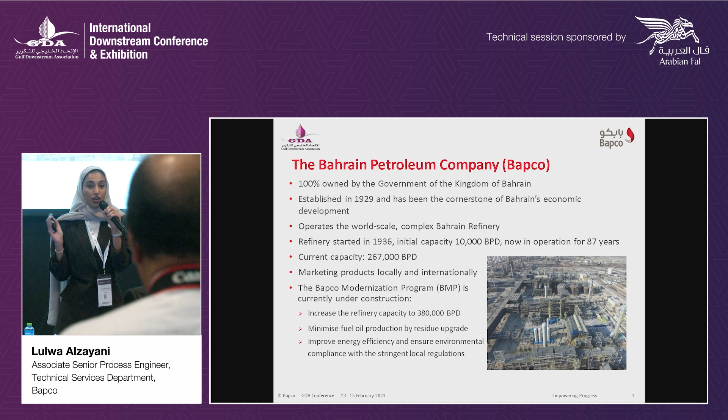And we did not stop at this capacity. Currently, we're working on the biggest project ever undertaken by BAPCO, which is called BAPCO Modernization Program, in short, BMP. This will increase our refining capacity up to 380,000 barrels per day. And also we'll be having one of the largest resid hydrocracker units, which will reduce our fuel oil yield further. And also many old units will be decommissioned after this project. So this will help us to improve our energy efficiency and our compliance to the environmental regulations also.

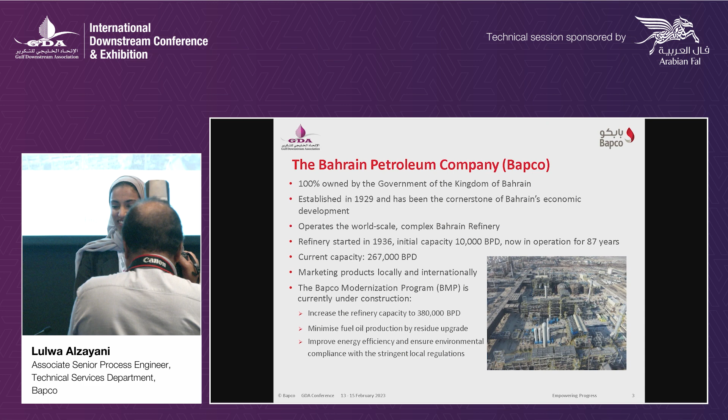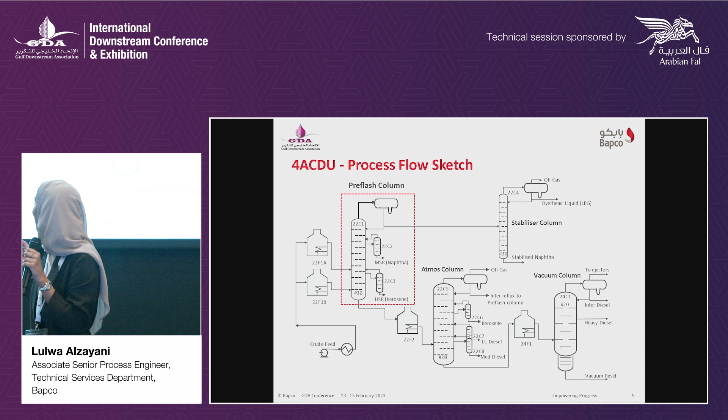Sorry. Okay, so, sorry, just. Okay, sorry, just.

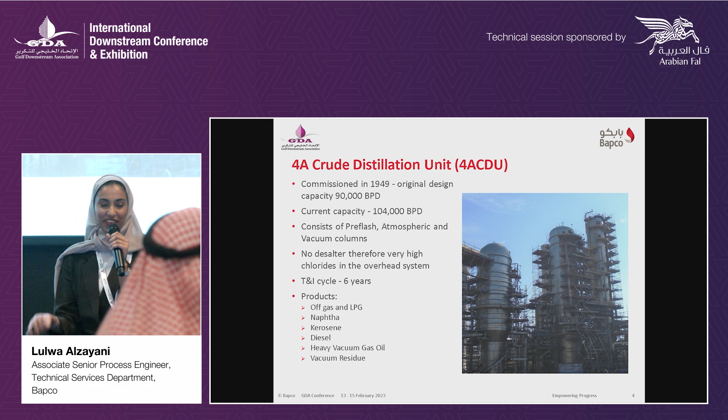Okay, so 4ACDU will be retained post-BMP, and it was commissioned in 1949 with a design capacity of only 90,000 barrels per day. And after revamps and modification, the refining capacity increased to 104,000 barrels per day. And it's currently the biggest crude unit we have in our current configuration.

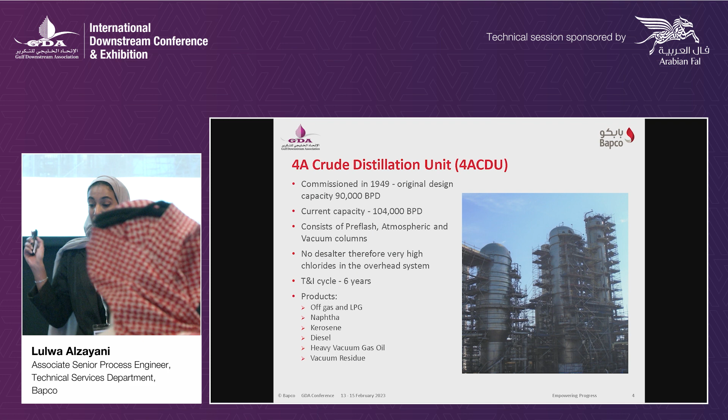So the 4ACDU is an integrated unit, as it has three main columns, which are pre-flash, atmospheric, and vacuum column, as we can see in the picture here. So this is a very recent picture of the refinery. As we can see, the columns are surrounded by scaffolding, and this is because we are currently in the middle of T&I, which happens every 6 years.

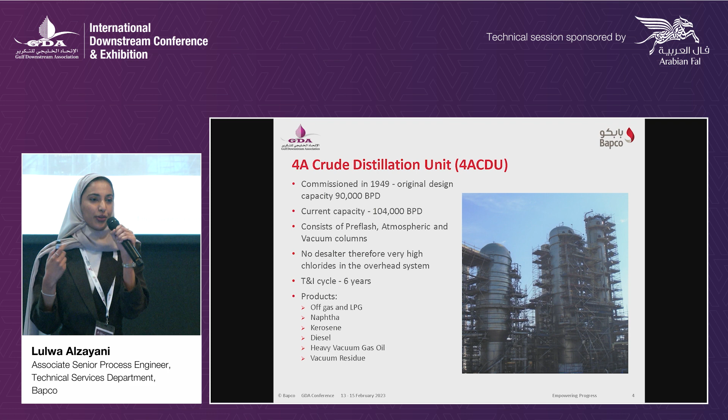Also, one more fact about the unit that is worth mentioning is that the unit does not have a desalter. And yes, we do have a very high chloride content in the overhead system, but it's all under our control. 4ACDU produces a very wide range of products, which we will look into in the next slide.

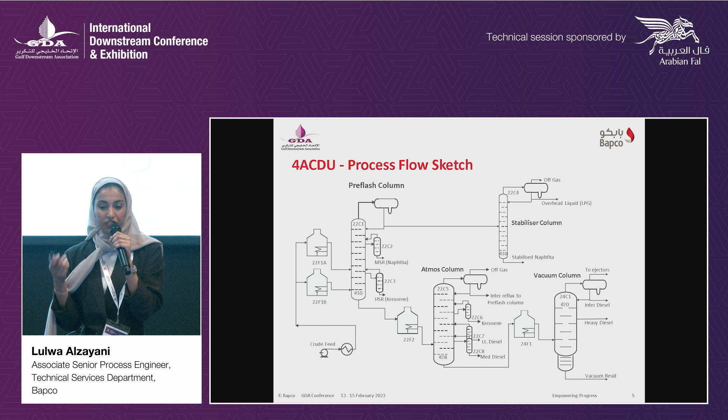So this is a simplified flow diagram of 4ACDU. So first, the crude enters the pre-flash column, which is separating the lighter cut out of the crude. We've got stabilized naphtha coming from this stabilizer, and also we've got MSR coming from the pre-flash column. From the pre-flash column, we're also producing the HSR, which is routed to the kerosene pool along with the kerosene coming from the atmospheric column.

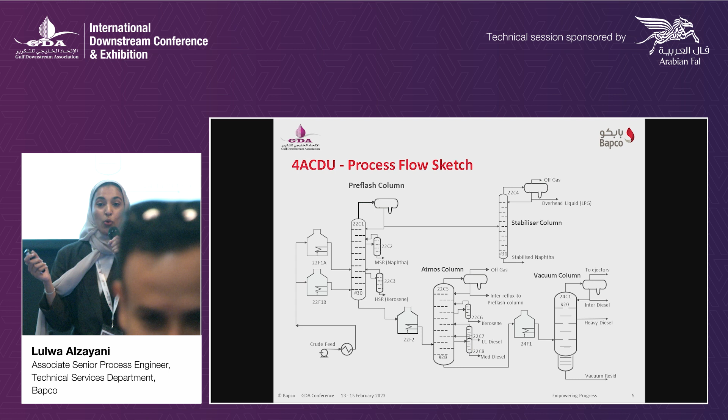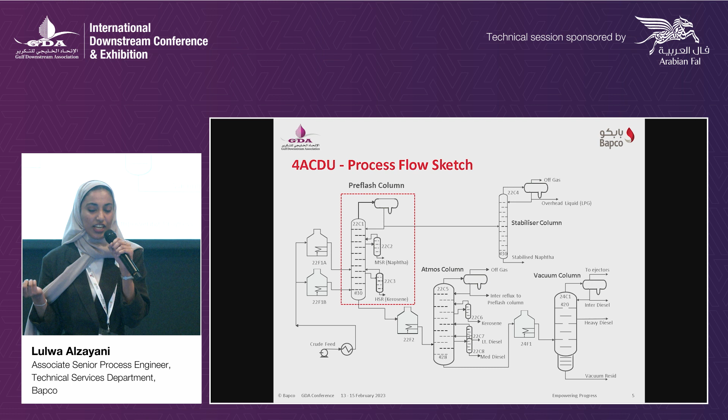We have three different cuts of diesel, which are light and medium diesel coming from the atmospheric column, and also we've got intermediate diesel coming from the vacuum column. From the vacuum column, we also have the heavy vacuum gas oil and the vacuum residue. So the scope of the presentation will be on the chemical cleaning that we used on the top section of the pre-flash column over there.

So the purpose of the pre-flash column is to separate the lighter cuts and the naphtha components out of the crude before routing it to the crude column. And this is achieved through these 30 trays. The chloride content in the overhead sour water is typically high, which ranges between 800 to 1,000 weight ppm. And this is, as I mentioned, because we don't have any desalter.

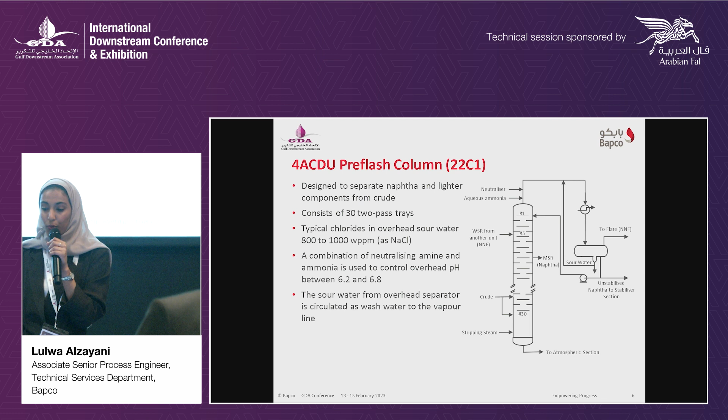So both neutralizing amine and ammonia were injected in the overhead line to maintain the pH between 6.2 to 6.8. And also we have the sour water circulated back to the vapor line as wash water, and this is helping us to reduce the potential of under-deposit corrosion in that line and overhead condenser.

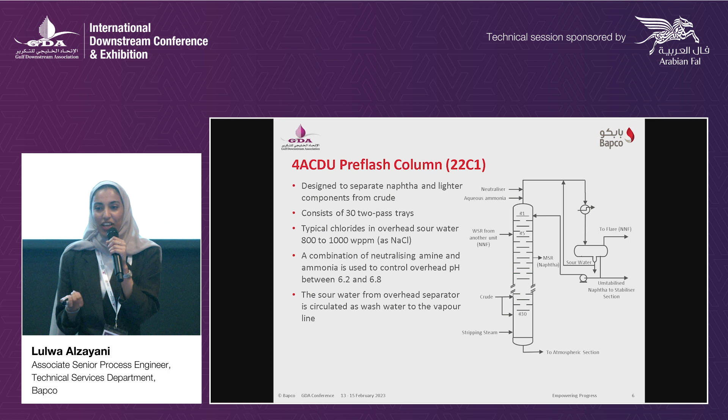So that was a summary about the unit configuration, condition, and arrangement. And now I'll hand over to my colleague Rakesh, who will speak more about the problem we had and the temporary action we took.

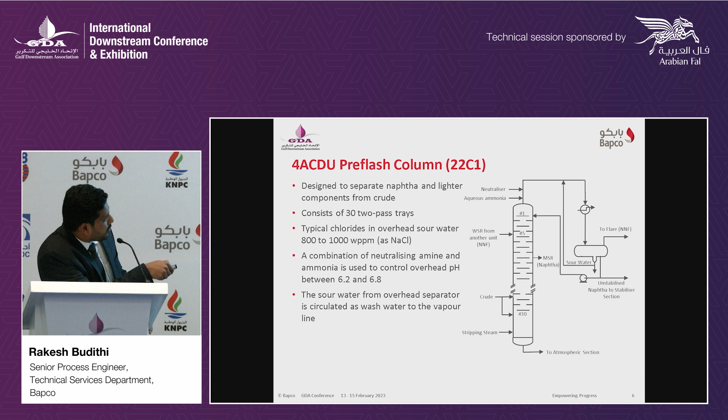Now let's move on to the main topic of our presentation. Well, on the day of the incident in June 2020, our pre-flash column had suddenly experienced a high sectional pressure drop in the top of the column, and flooding phenomena was very much evident in the top section trays, that is from tray 1 to tray 8. Let me take help from the previous slide. So this was the section, from tray 1 to 8, where we had this high pressure drop issue.

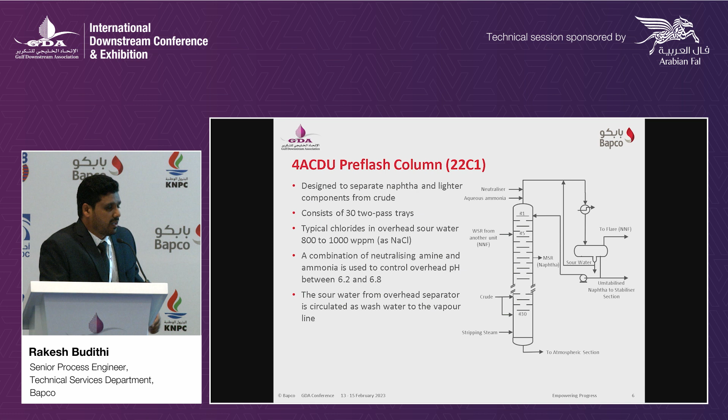And the top section pressure drop eventually went up by more than 3 folds from our normal sectional pressure drop of 1 psi, and the top vapor line went up to 290, and our top reflux flow jumped up to 1400 barrels per hour, which was our alarm limit value.

Furthermore, there was some disturbance seen in the overhead section, in our overhead accumulator, and that continued up to the downstream stabilizer section due to the overwhelmed naphtha production which was feeding our stabilizer column.

As an immediate recovery measure, our technical team and operations team together thought of reducing the feed rate to sustain the unit operation, and that helped to minimize the flooding, and basically reduced the load in the top section.

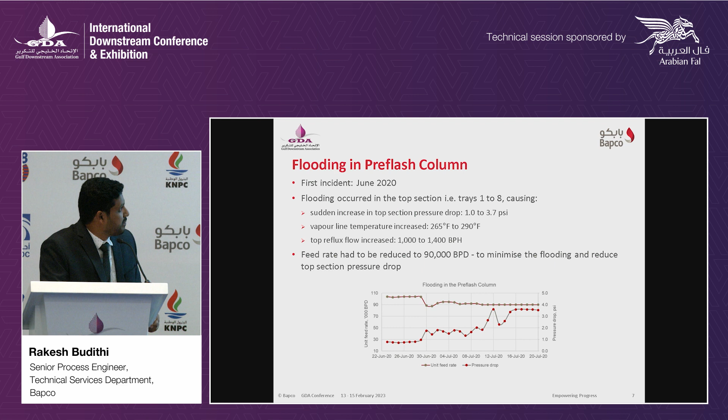As we are all aware, those were the days when the whole world was hit by COVID, and especially the oil industry saw that hardship. Crude and product prices were so volatile, and the market was so dynamic, and BAPCO was no exception. So therefore, there was a need to keep our assets reliable and ready to face any kind of demand which comes from the market.

So, having said that, shutting down the unit was not economical to troubleshoot or to do any kind of maintenance activities.

Therefore, our process team had devised a scheme to route part of our total reflux demand from the top of the column to tray 5. So we have provisioned a jump over line all the way from the top reflux line to tray 5 on the run using the hot tap method.

There is a little background for why we had chosen tray 5: we have done process simulation, and also using our general experience, usually crude columns are much more prone to fouling in the top section of the trays, usually from the top tray to tray 3-4.

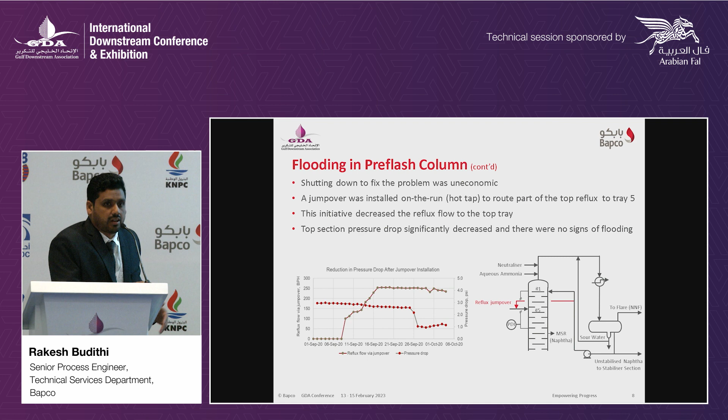This fouling in the downcomer had reduced the clearance between the downcomer and the tray below, and led to liquid backup over the tray and resulted in the high sectional pressure drop. The fouling deposits were analyzed and proved to be ammonium chloride salts.

During the shutdown, the column was cleaned up and we ensured no fouling was left over. Soon after startup, we observed that the pressure drop had become normal, like our startup run, and it was healthy. So this was the first part of our success story: we were able to sustain our unit run up to our planned shutdown of October 2020, without an unplanned shutdown for 3 months, from June to October.

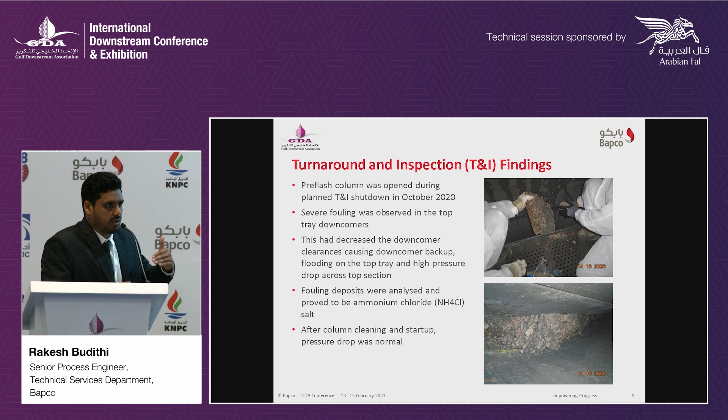Just after a few months of steady operation, the flooding issue reoccurred in July 2021 without any prior indication, and this time our pressure drop increased up to 2.5 psi. As a customary measure, we immediately reduced our feed rate and re-established the reflux jump over. That helped to increase our feed rate to some extent. However, we could not maximize the feed rate.

You may be wondering why our reflux jump over did not work in this case, unlike previously. There is a reason for that. The first incident happened in June, and this happened in July. In this region we have peak high temperatures in July, which forced our top reflux temperature higher compared to the previous time. So we were not able to alleviate the flooding issue completely.

Various ways were explored by our process team to maximize the feed rate. One such measure was to reduce the coil outlet temperature of the heater, but that led to decreased MSR and LSR yields. Hence, it was not an optimum operation, because we had to fire hard in the downstream sections to recover the lost yields from the pre-flash column.

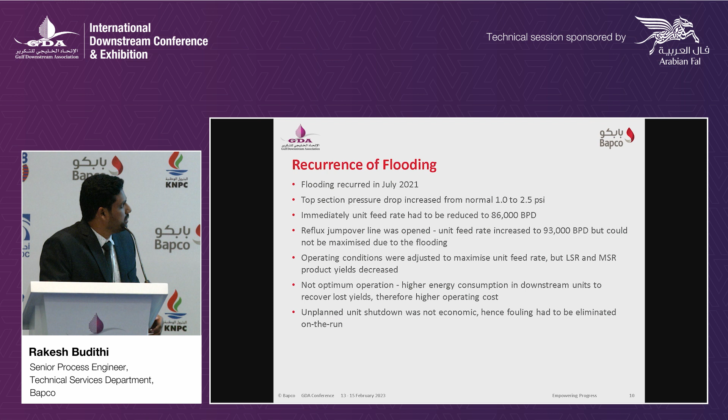This time our process team looked at various options and checked with all our networks within the region. Since the fouling was due to ammonium chloride, as was evident from our last outage, we checked with different suppliers and were able to successfully find a potentially suitable chemical to remove the salts online.

The BAPCO team has worked to make provisions on a war footing basis. Just within 1 month, we made all the setup, and we made a provision into the top reflux line to inject the chemical. As soon as we started the chemical injection, within a few hours, we started seeing the benefits as the sectional pressure drop started reducing.

And to second that, the neutralizing ammonia we are dosing, the demand of the ammonia started coming down. This is because, as part of the chemical reaction, the ammonia will be liberated from the salts, and that will be taking the load of the fresh chlorides coming from the crude. So therefore, we were able to close the ammonia dosing completely towards the end of the trial.

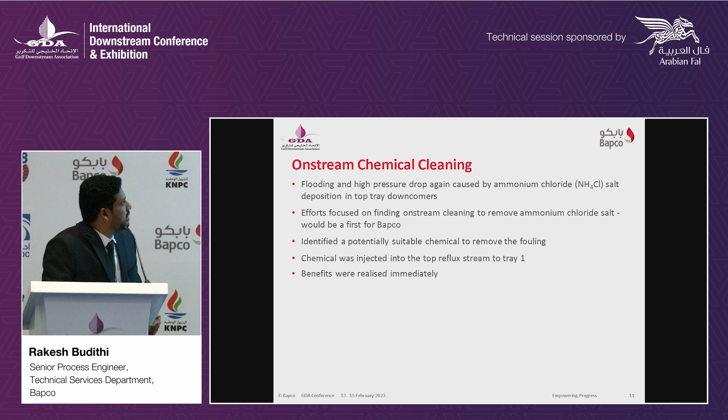Well, to summarize the results, our operating conditions, as I said before, have returned to normal. We have normalized our coil outlet temperature, and therefore LSR, MSR yields were normalized. As a result of the successful online chemical treatment, we were able to close the jump overflow completely, and our top reflux flow has normalized

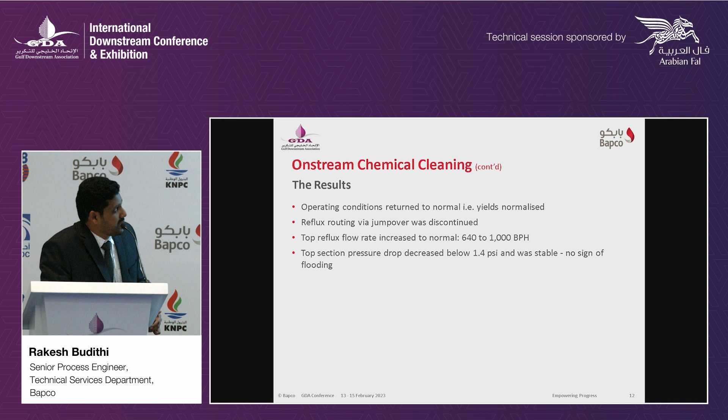to 1,000 from 640 barrels per hour. And the best part is the top section pressure drop decreased to 1.4 psi and was stable, and there was no sign of any further flooding.

This slide outlines our conclusion on this trial: on-stream chemical cleaning was a great success, as the ammonium chloride salt deposits were removed from the tray downcomers successfully. And this was the first time in BAPCO's history to deploy a chemical to remove the overhead salts. And this has definitely avoided a costly unplanned shutdown. Indeed, not once but 2 times we have avoided it.

This is regarded to be an innovative approach to troubleshoot the overhead fouling issues in the crude pre-flash section. And lastly, post-cleaning, the unit has been running well since, there was no sign of flooding, and there was no indication of high pressure in the top section.

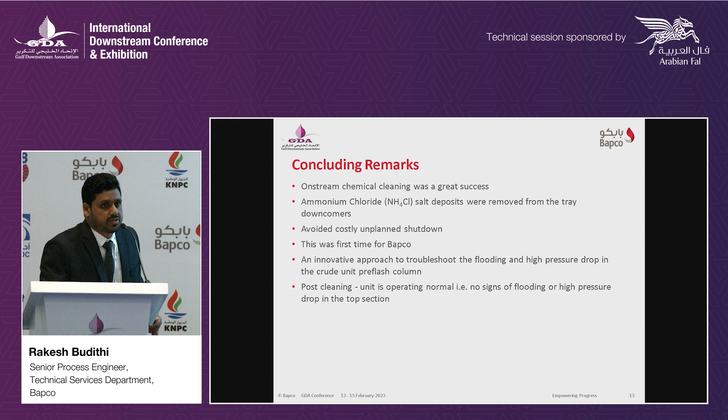And this slide outlines the key factors that helped achieve this success. At BAPCO, we all strive for operational excellence, right? BAPCO follows and delivers operational excellence and business resilience by a systematic approach towards personal safety, process safety, reliability, efficiency, and environmental performance. To achieve such performance improvement, it is necessary to possess a technically strong in-house team to always look for opportunities and to improve the reliability of the system.

It is also important to pay attention to detail, as significant gains can be achieved from recognising opportunities. It is also important to have strong networking within the industry, and knowing new advancements within the business that will help us improve our systems. And of course, a close collaboration between the multidisciplinary teams is very important, and with the chemical supplier as well. As I said before, the whole team worked shoulder to shoulder relentlessly towards one goal, to improve the reliability of our unit.

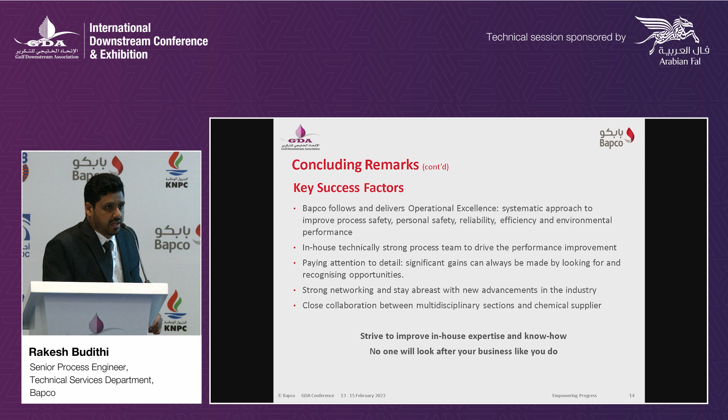So lastly, always strive to develop and improve in-house expertise and know-how, as no one will look after your business better than you do.

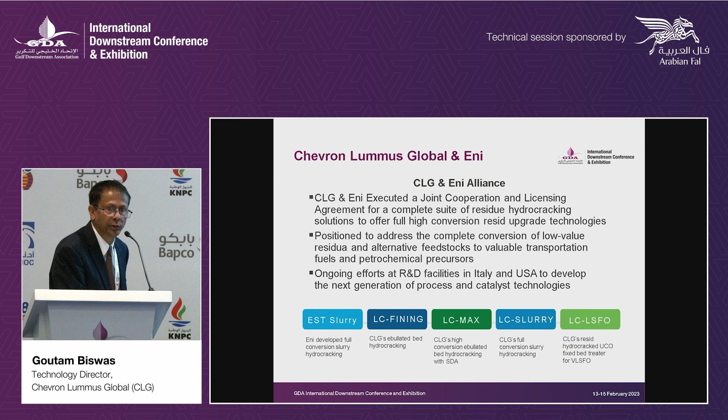Similarly, on the ENI side, they have been very successful in commercializing the slurry technology. In fact, currently 3 of the units are running, and Raffaele will share more details about that. This alliance was made to make sure we are able to offer the whole suite of resid technologies to our potential clients. And we are investing a significant amount of money and resources in R&D to improve the slurry process, as well as come up with a catalyst that's going to reduce the cost of operation for our licensees.

Next, I wanted to talk a little bit more about the product and petrochemicals outlook, and also decarbonization, and how that's going to impact future investments. Over the last couple of days we heard, particularly from S&P Global, that there is going to be demand destruction, particularly in transportation fuels like gasoline and diesel. So refineries have to adapt to a future where there is going to be sufficient demand in other products, like jet. You heard about biofuels, that's one area, and we'll talk about it here too. But there is also going to be demand in naphtha, and the main reason is there is significant demand for plastics or chemicals that's almost going to double in the next 2 decades or so.

In fact, about 10 million barrels per day of additional hydrocarbon liquid will be needed to supply the petrochemical sector. While refineries will adjust operation to produce naphtha or maybe hydrotreated gas oil to feed petrochemicals, there is still going to be about 4 million barrels per day of shortage. Those 4 million barrels per day of additional feedstock will mostly come from crude, some of it directly crude to chemicals, but that will have a resid processing unit. Others will come from traditional refining processes, through more traditional hydrocracking, where you might have a diesel hydrocracker or VGO hydrocracker, but there also you will have a resid hydrocracker.

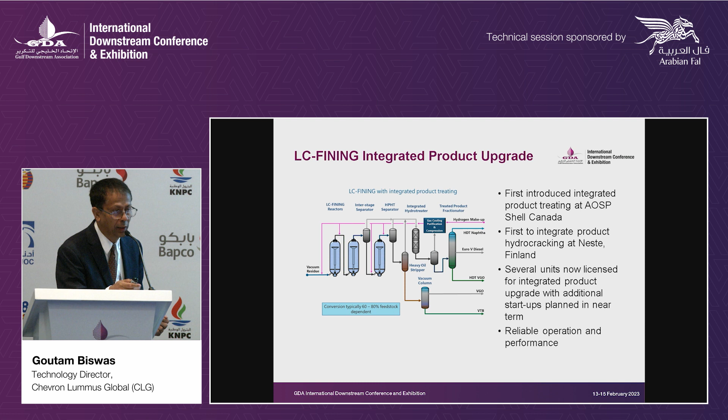This was first done for our Shell Canada unit in Edmonton. Since then, we also had a 2-stage hydrocracker built at Neste. So this is well proven, and all those units are running. The same thing we are going to incorporate in the EST unit, taking the experience from LC-FINING integrated hydroprocessing for product upgrade, where we'll put a fixed bed reactor in the same high pressure loop to upgrade the product. In that process, not only are you reducing the capex, you are also reducing the energy input, so that will create less emissions.

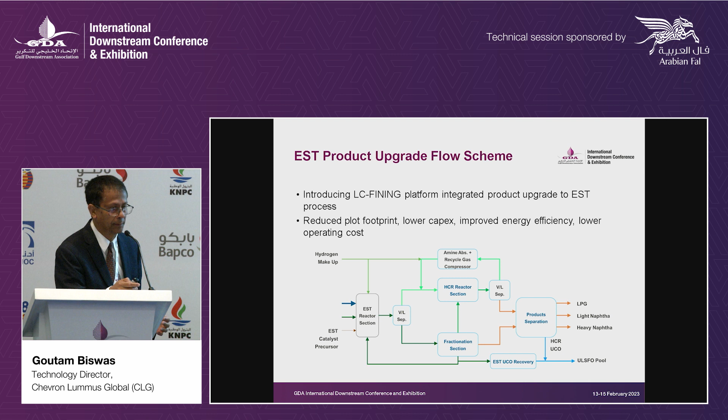The other thing is, every investment happening today, one question is being asked: is that going to be used for the future? Even in Gulf countries, looking at processing biofuels or waste from municipalities, can you utilize existing assets or assets you're going to build to process this type of product? Our technologies like EST and LC-FINING can take feedstock from circular or bio feedstock and process that.

In case of circular feedstock, you can take pyrolysis oil from plastics, or if you have the right type of plastic material, make that into fine solids, and co-feed with other feedstock like VR in our resid hydrocracker unit. You can upgrade to products, either feed it to the petrochemical unit after hydrotreating, or make transportation fuel.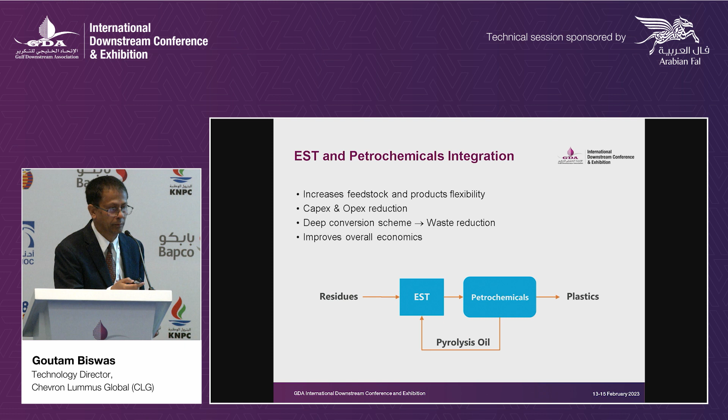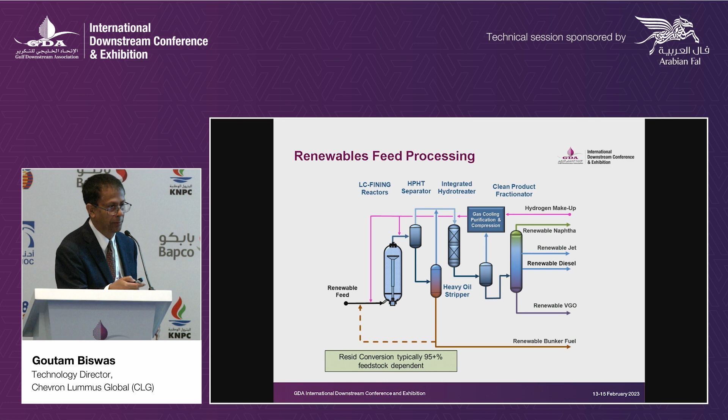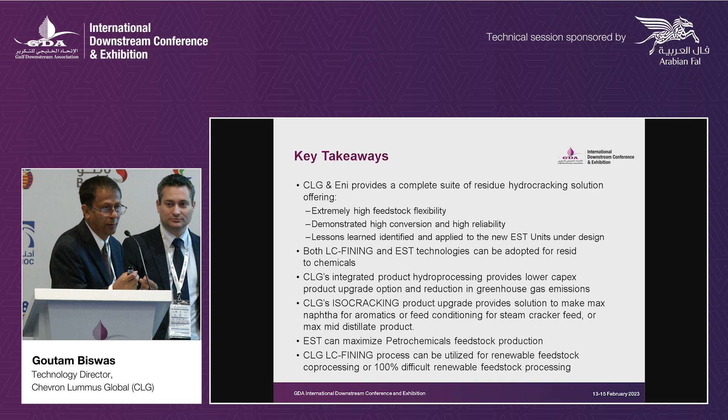I'll add one more thing, there's been tremendous success in our EST licensing. There are 3 units operating. After we formed the alliance, our first license was signed last year, and I think one of the owners, ZPC, is signing a third unit. So there's a lot of experience being built into that. We'll be happy to answer any related questions later on. Thank you.